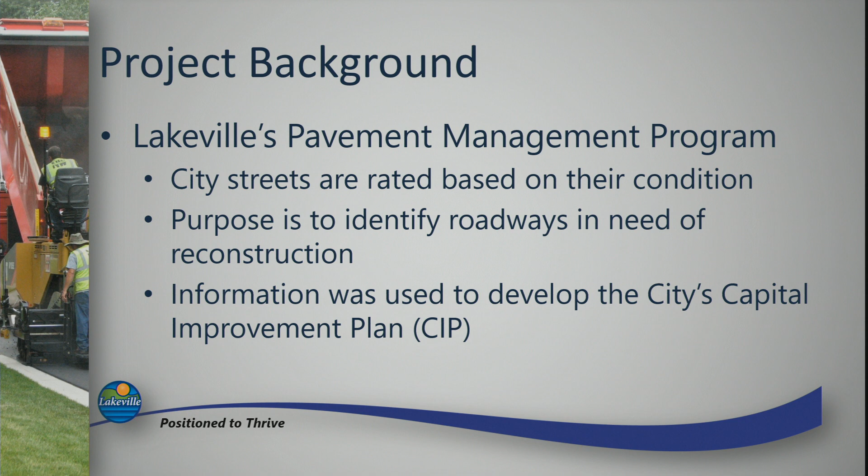So we're going to walk through the areas now. It's a little hard to see the maps, but when you get up we can look at it in more detail. This is the first area with Jay Court, Jaguar Path, Jarl Court, Jacquard Court, Jacquard Path, Jaeger Path, Jaeger Court, and Jambeau Court.

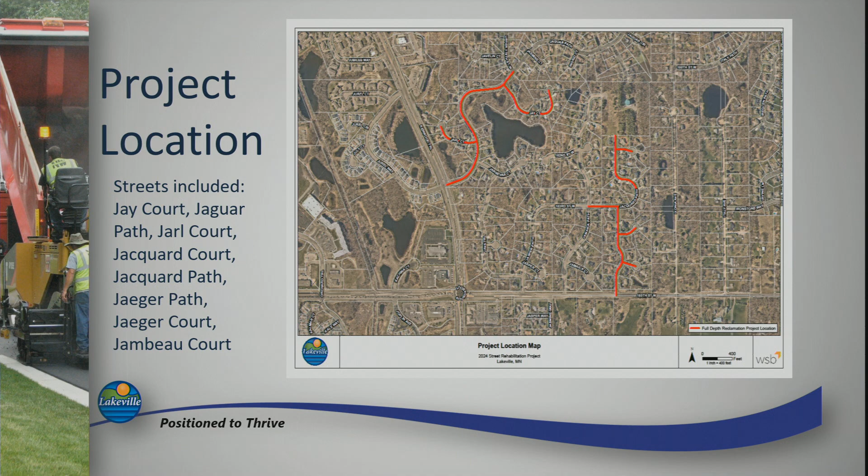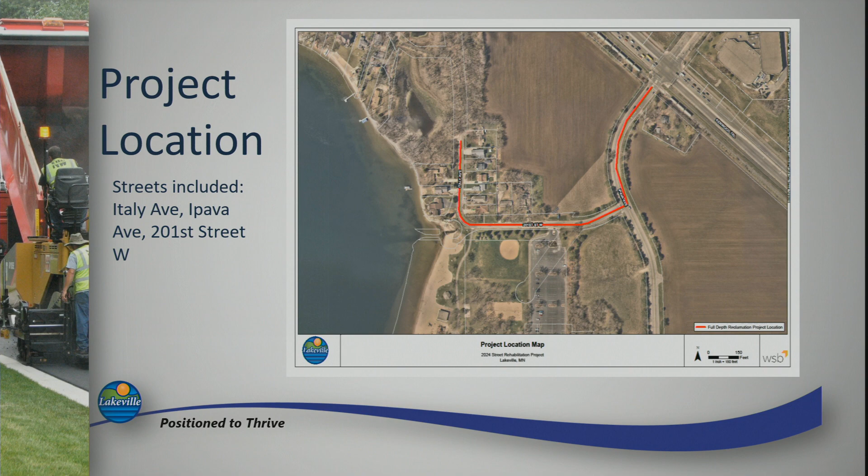As we go through here, the city does a great job of putting together case-by-case individual analyses of each road. They look at the road condition, the utilities, and the maintenance history, and they figure out what areas of the city need improvement. As you can see from the maps, it's not one big giant area — they individually look at roads and figure out exactly what makes sense to be cost effective.

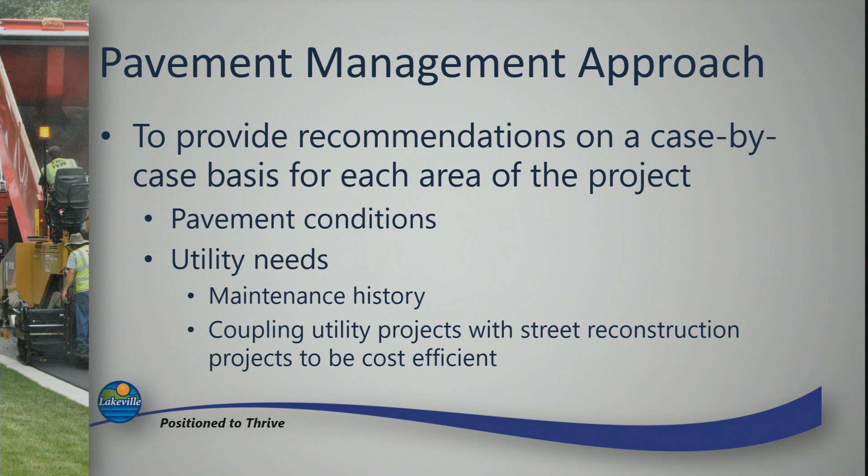So for this project, we're going to be doing street reclamation — come in and fully remove the pavement, grind it up, and solidify that base that we'll be rebuilding the road on. Along with that, we're going to be doing a lot of spot curb and gutter work, where there's cracked curb, or as you can see in some of these pictures, the curb and gutter is just wearing away near the actual storm basins. On top of that, we'll be looking at storm sewer improvements — whether the manholes, the pipes, or anything in between needs to be improved or replaced.

This picture is actually at 205th and Holt Avenue, so you can see that the road has definitely been patched up a bit and is in need of being replaced.

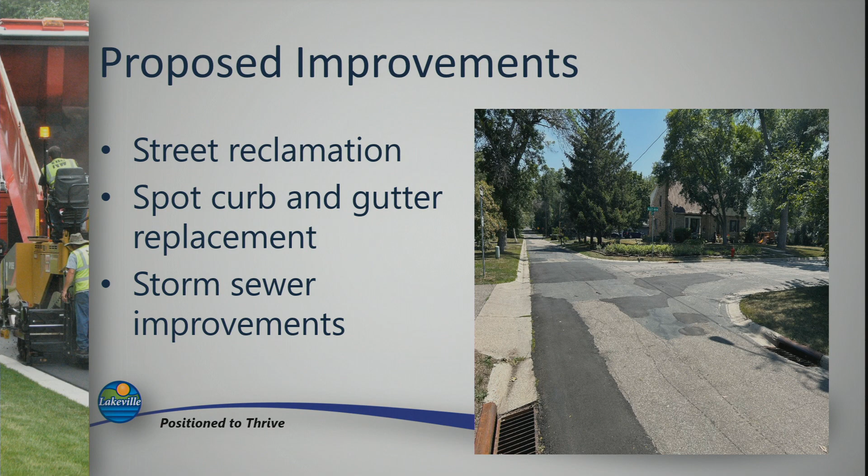Talking a little more about the storm drainage, we do an individual analysis on every road to identify whether there are additional storm sewer structures that need to be added, and whether the existing storm sewer structures are above or under capacity. That contributes a lot to whether there's water standing on the road or ice buildup in the winter, and all of that deteriorates the road.

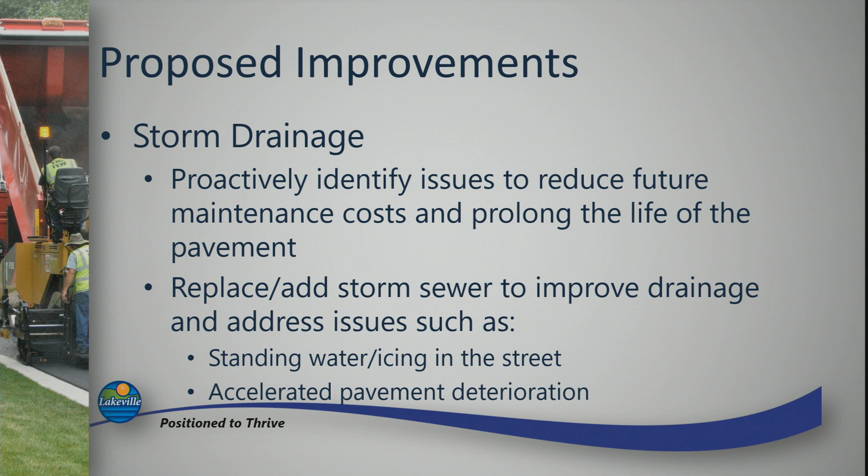So the better we can get the water off the road and into the system, the faster and better and longer the road will be, and nicer, smoother, and much better to drive on.

Another aspect of our design is we're looking at water quality. So for all the storm sewer basins, or ponds in this case for the city, we look at each individual system. Like over on Jaguar, we look at all the water getting to that pond and figure out, one, if we're treating it beforehand, and two, once it gets into the pond, if it's building up any sort of sediment basin that we need to clean out, or just overall improve the basin in general.

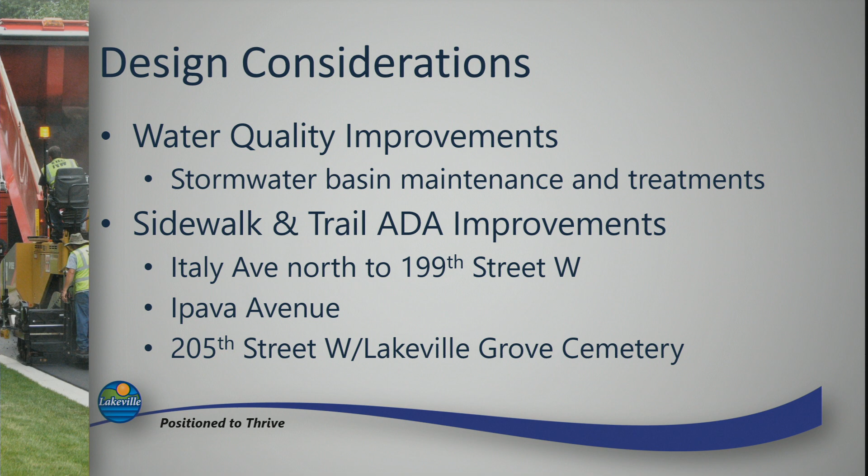Along with water quality and storm sewer, obviously the city streets have a lot of sidewalks and trails along them. We have a list here of a couple areas that we're going to identify for trail improvements. Trail improvements include both the actual walking path and ADA improvements, so we'll be putting ADA quality ramps on all of these. Anywhere there's a sidewalk that needs an ADA ramp will have one as well.

Kind of the evaluation process: the city looks at all the roads and all the utilities within those roads. They go through and televise storm sewer, send people down the manholes to inspect them for both storm sewer and sanitary sewer, and review all the water main to see if it's been maintained well or if it's old.

They're going to go in and, in most cases, replace when they need to replace. Obviously they want to do this cost effectively, so they have a record of all the maintenance that's been done, and we'll go back and adjust accordingly.

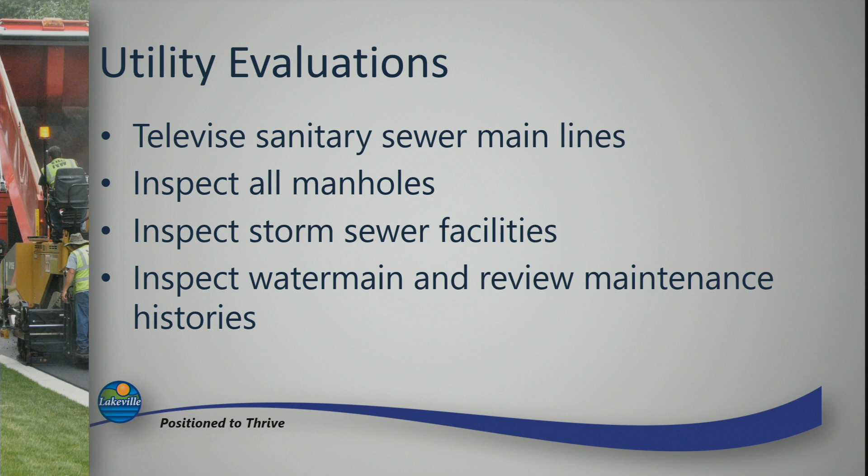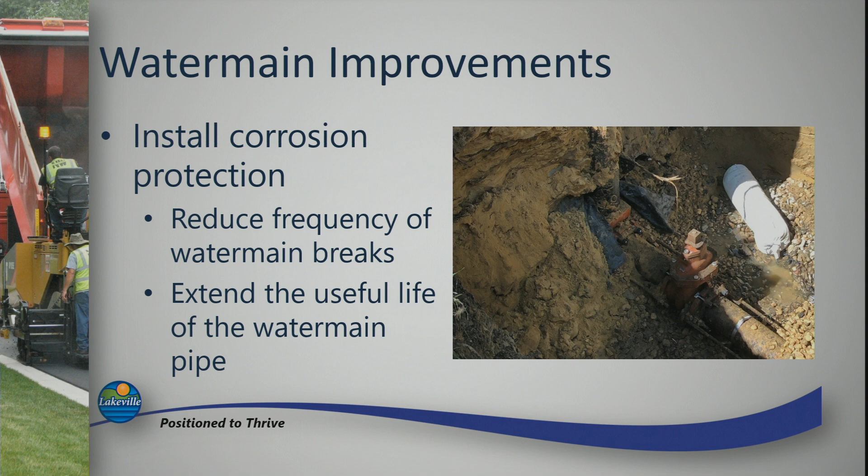One thing they've started installing to help the life of the water main is corrosion protection. That big bag in that picture is basically cathodic protection, and it helps reduce the corrosion of both the pipes, the bolts, and everything on the water main that naturally flows through the pipe. So we install that everywhere on our water main—if we're going to open it up, we're going to put that in there.

And then, obviously, all of this put together makes more sense if you do it at the same time. So the city's going to evaluate pavement, the city's going to evaluate the utilities, and we'll couple that into looking at the life of the roads and figuring out exactly what roads to pick at what times.

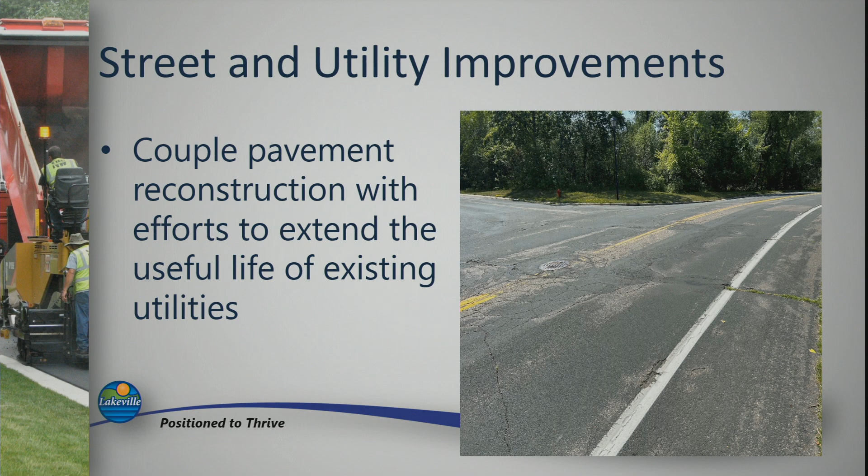Special assessments: all of these roads will either be a full depth reclamation or a full reconstruct. Per the 429 process and per the city's assessment policy, the street and storm sewer costs will be assessed at a 40% rate, but it's not per lineal footage of your property—if you happen to live on a corner, it's just per unit. So each of these areas will have a different assessment amount, depending on the benefit to the property owners for that road.

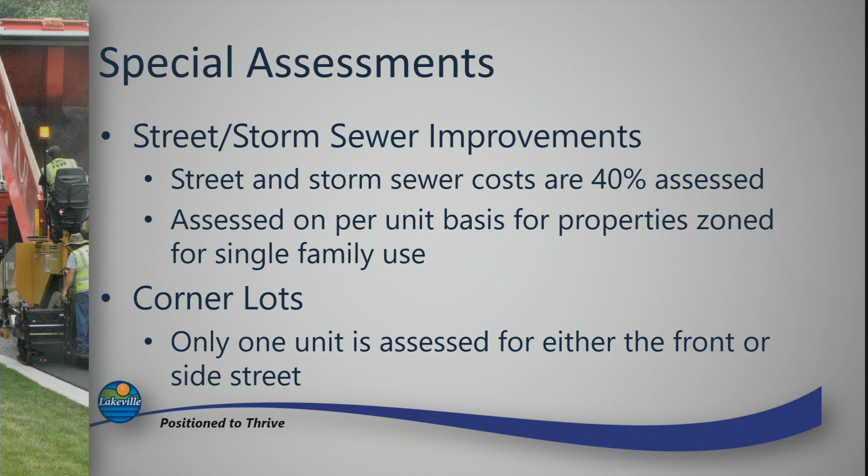We have not done that calculation yet. We are just getting into the beginnings of our evaluation and survey for the project, so that will be forthcoming at a later date.

Speaking of our schedule, obviously we're here tonight for the first neighborhood meeting. We'll be putting together a feasibility report from now until October when we present it to council. We'll have a second neighborhood meeting in early November—that's when we'll have your assessment numbers and individualized assessments for each area, so we can present them to you and answer any questions before the actual public hearing on November 20th.

Once we get done with the feasibility report and present it to City Council, we'll be preparing the plans and specs for the project. That'll take us through the first of the year, when we accept the plans and specs and go through our online bidding process, opening bids on February 20th. The final assessment hearing will be on April 1st.

Starting as early as April or May next year, we will be constructing this. This will be a one-season construction.

As of right now, we are out—you guys may have seen some of the survey crews out there getting survey done. There's also geotech that will be out there doing cores, GPR, and eventually soil borings over the next three weeks. If you see us out there, feel free to give us a call if you have any questions. Otherwise, that's what they're doing out there: collecting as much data as we can so that we can fully design this to the best of our abilities.